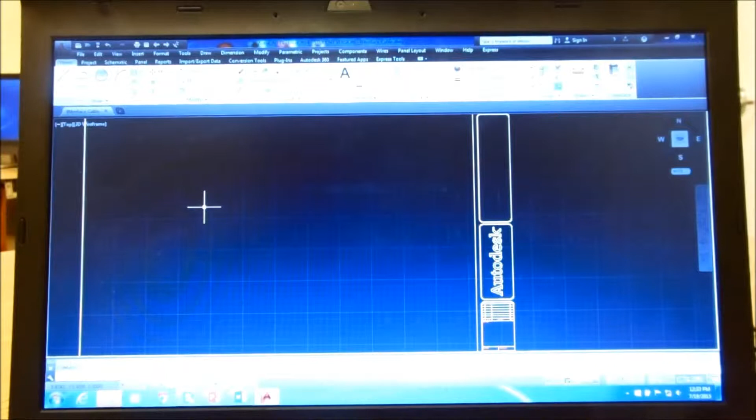Okay, and this is one of those things that from our class we also got to install AutoCAD Electrical. This is pretty good for PLCs and also for just doing wiring and whatnot. So what we're going to do is set up this drawing. It's a blank drawing right now, but we're going to do some ladder logic and also the interface cable.

And this is just a blank template. If we can zoom out a little bit. And this is just a blank template. So what we're going to do here is take a look at the properties.

We're going to give it a name. Well, sheets, we'll just say that this is sheet number 1, and it'll be sheets 1 of 1. And the title is going to be... call it interface cabling, and this will be for title number 2.

We'll call it, and you have to keep the names short so they don't take up too much space, but it'll be controller to garage. We could probably put more information to say it's for the automated parking garage project, but it's okay as is.

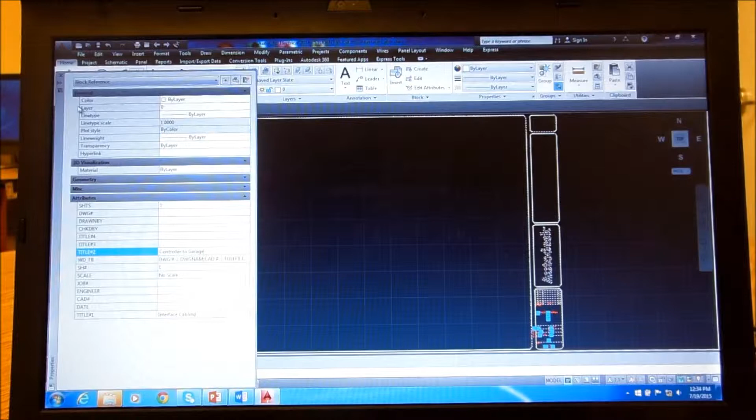Now we'll say that's okay, and that puts it down in this corner right now, right down here. So we have our interface cabling controller to garage, and what we're going to do is...

If we can not get lost in our drawing here, and I haven't worked out how the zoom works, but what we can do is go up here for the schematic, and what this thing with a ladder, what we're going to do, even though this is a cabling drawing, we're going to insert a ladder for this, and we're going to put in a ladder.

And what that does, we're going to make the paper pretty wide since we want the drawing to take up most of the width of the paper, and we'll make the spacing 1 inch. Now I've taken a look at this, so I know about what's going to fit.

Now here we're going to put 20 rungs. We have a 20 to 20 interface. It's straight across, straight through, and so the rungs work perfect. What we'll get is a drawing that is straight across just like this.

And you can draw it with no bus, which is no bar on the side. You can do it with no rungs in the middle. We don't want that, but we want them all. We don't want to skip anything. And we'll just put our first wire number as 101, and then it'll index it by 1 all the way down.

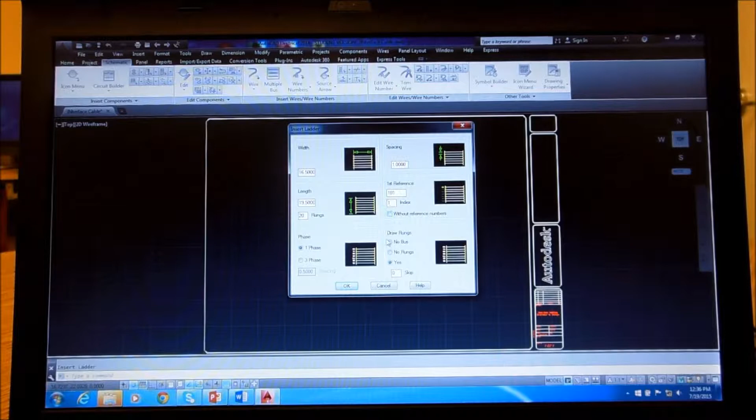So we said OK, and now we just hit a start point, and we can put it anywhere since we can move it, but we'll pick, let's do there because that's where the grid is, and see how that works. And that puts it in fairly well.

Now if we want to move it, we can just select the whole thing, go to home, and just do move, and there we can move it around just a little bit. Try to center it a little bit more. So we'll put it right there.

Now if we want to do, we'll put in text and we'll name all our signals. Now we'll do multi-line, and we'll just pick a point. It's not really that important.

Now what we want is we'll start doing some of our things that we can make custom to our drawing. So we'll say the height. Now because our spacing is 1 inch or 1 unit per rung, we should make it about half that. So we can make it 0.5, but we'll make it 0.4.

And now we want the line spacing, which is an L. We want that, and here it says, do we want it at least or exactly? We'll say, since we know it's 1 between the rungs, we'll make it exactly 1 between our multiple lines.

And here we can put in how wide we want it. And if we're 16.5 across, we don't want to go beyond, say, 10. And so now we've got a little ruler there, and now we just enter our text.

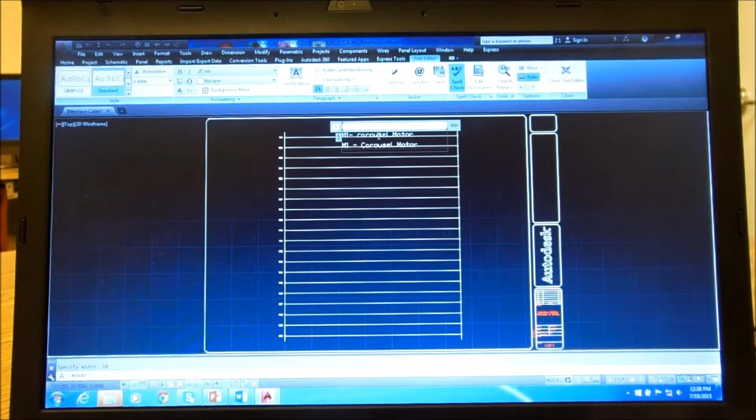And then when we're finished, we can just hit return, and then it'll go carousel motor return. And we'll make the return capital, and then for the next pinouts, pin 3 and 4 are the 24 volt DC, so we'll make those both plus 24.

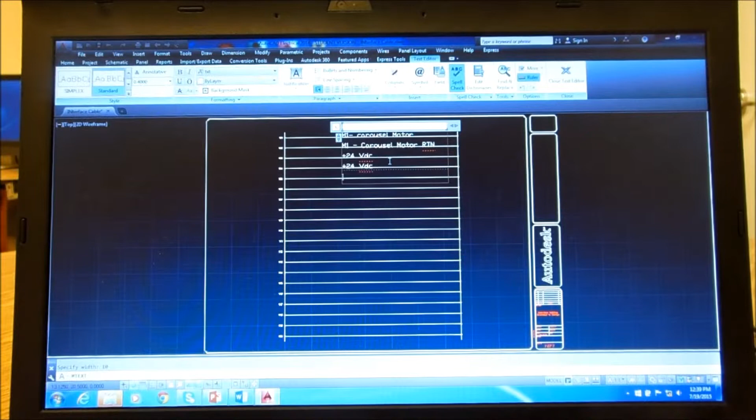Okay, we're going to complete that to the end, and we'll turn it off right here, and fill in all of it. We've filled in all the blanks, and we're almost finished. Our last line is going to be the first floor request, so we'll put in PB1.

And we'll show you what happens if you go beyond the width of the symbol, and why you want to make that wide enough so you won't go beyond that.

Let's see, we'll put in car request for first floor. What happens is it automatically goes to another line, so if you have your spacing correct, you don't want to do that because it'll mess everything up.

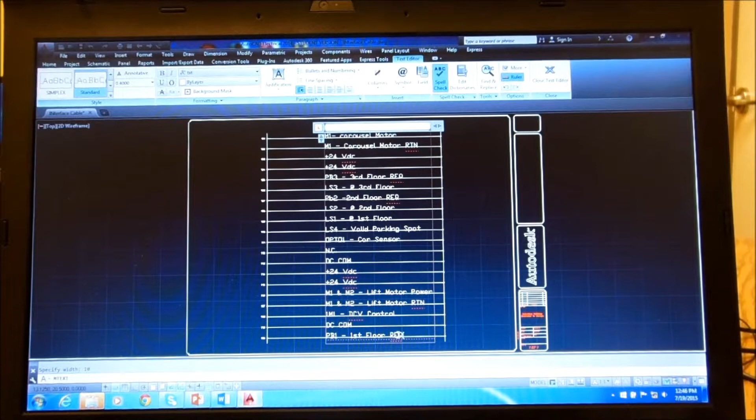So we'll go in and just get rid of that, and now we'll keep on creating lines unless we just hit escape. And it asks, do we want to save? Yes.

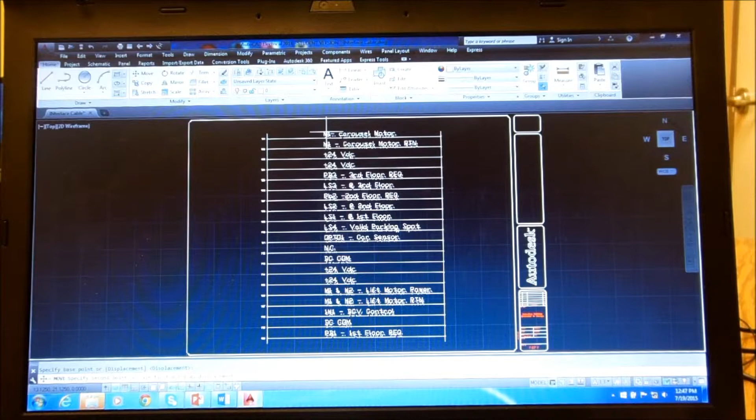So now we've got a couple things to look at. First, our text is just a little bit too low to really read, so it's all as a block. What we can do is select it, go to home, and move it. We move it all as one big block, and we can move it any way we want, but we want to make it readable, so we'll take a look at putting it there.

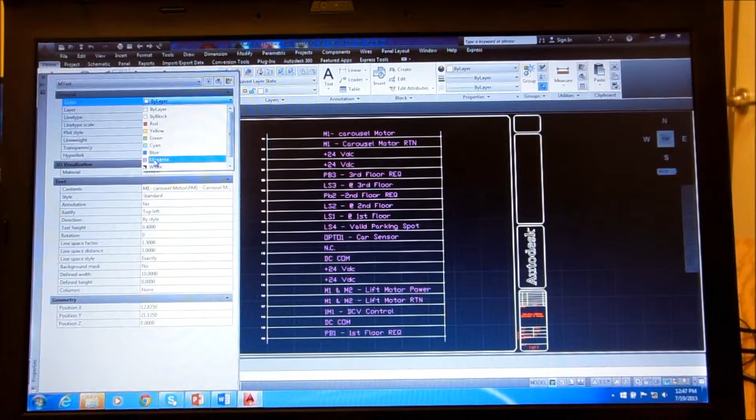Another thing we can do is take it all and go down into the properties, and because I don't like the white on white, we can go into the color here and select a color. Red isn't too good, yellow looks pretty good, so let's make it yellow. We can escape there, and now we've got all our print in yellow.

Now there are also a couple things that are wrong. Here we've got a lowercase b that should be capital, and carousel should be capitalized too. So what we can do is go in here and tab right to the letter that is not correct and just change that.

We'll do the same thing down here with the B. We'll just backspace over it and put a capital B. Those are some of the nice features you can do with that.

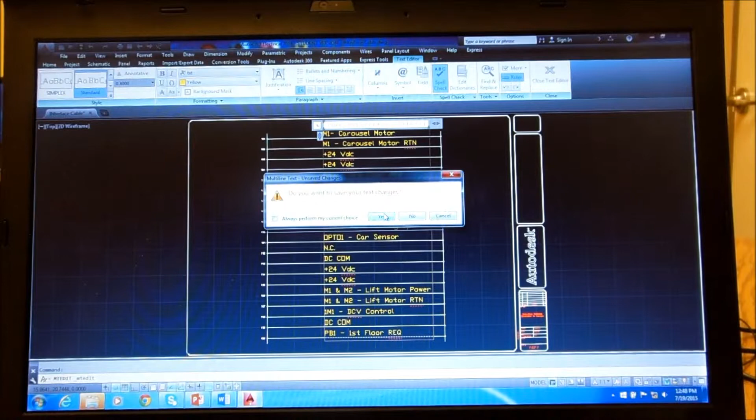And we want to save our text. Yes, we do. And if we want to put additional text over here, we'll just put a single line over here, and we'll keep it the same height. Now it just asks, do you want the height, and do you want to rotate?

We could rotate it 90 degrees, and then we can put in the text. At this side we want A2 controller, and then over here we want to put in A3 garage, so we know which end is which.

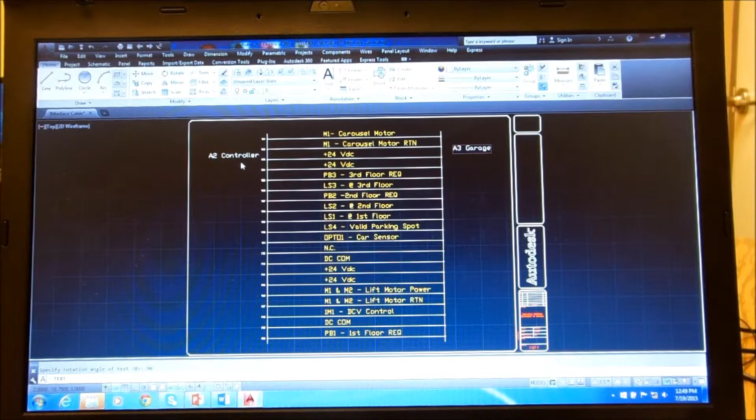And we can escape. Now what that did is put it at 90 degrees. So now we select it and move it, and we can move it down there. Now if we find out where our other one went to, well, I'm not quite sure.

Things we can do with this, we can scale it if we want it bigger. So we might put it there, we might move it. And we can also just copy it, so we can copy this and move it over here.

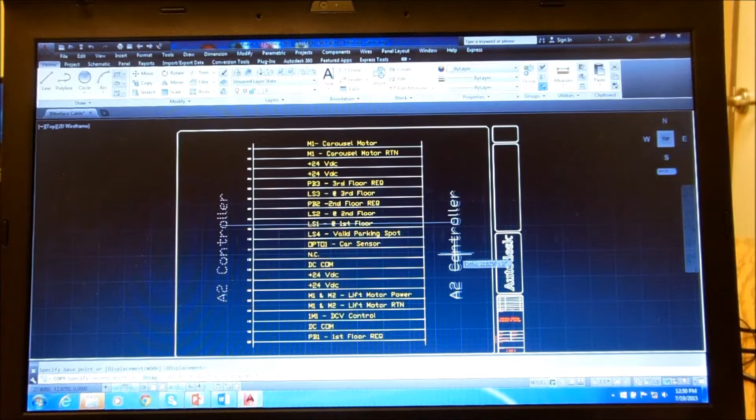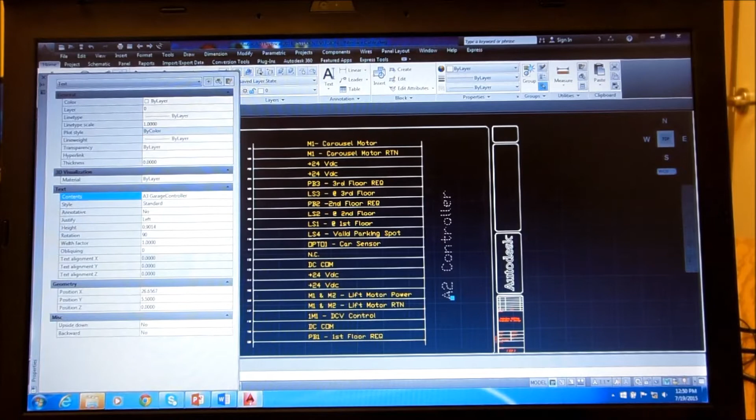For this, you should have ortho and snaps on so they come straight across. And what we're going to do with this is change this guy's properties so that instead of A2 controller, we'll make him the A3 garage. And let's say OK to that. So now we've got our controller and our garage.

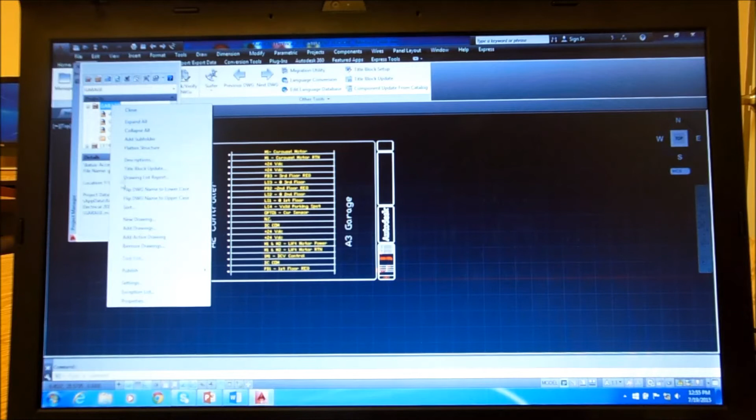One final thing we should do, when we have our drawing kind of the way we want it, is go over to the manager. Now we have our garage, and we have the wiring diagrams, and some of the controller assembly drawings. What we should do is highlight this guy, then right-click him, and we should say Add Active Drawing. So we're going to add this drawing, our interface drawing, to our garage assembly.

So we say Add Active Drawing. Now it'll say, do you want to apply the project default values? And yes, we do.